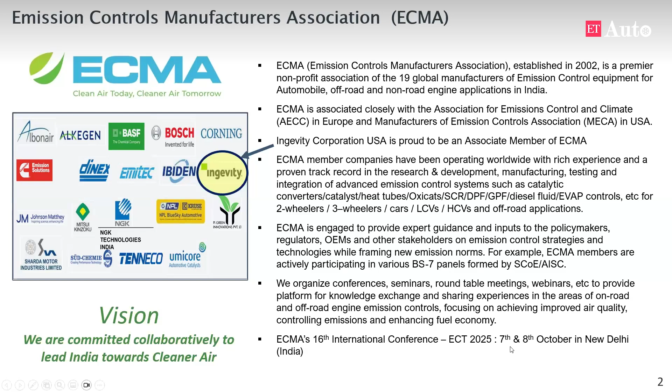Through these webinar series, the objective is to share knowledge with ECMA's family of experts in areas of relevance and interest for today as well as for tomorrow. We would like to disseminate information about cutting-edge technologies and robust solutions that offer ECMA members as well as OEMs the means to meet current and forthcoming stringent emission regulations with an array of fuel options and technology solutions. I'd like to enhance the visibility of ECMA in the automotive world through ECMA's knowledge and expertise, encourage skill development, and provide opportunities for collaborative and participative activities, and update on emission regulations, policy implications, and solutions, hoping that we all learn from these interactions.

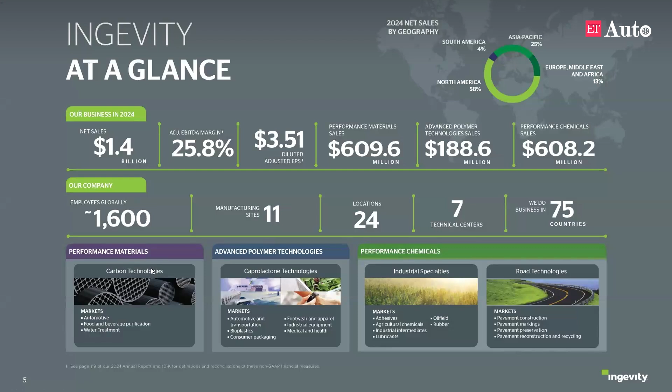We also have a performance chemical and advanced polymer technology segment, which we won't be talking much about today, but we do offer a variety of solutions in automotive coatings, as well as road technologies and road construction applications. Just a quick snapshot of our global presence: we have manufacturing operations in the US and China, and also technical labs and resources within India as well as Europe, again to support our automotive customers globally.

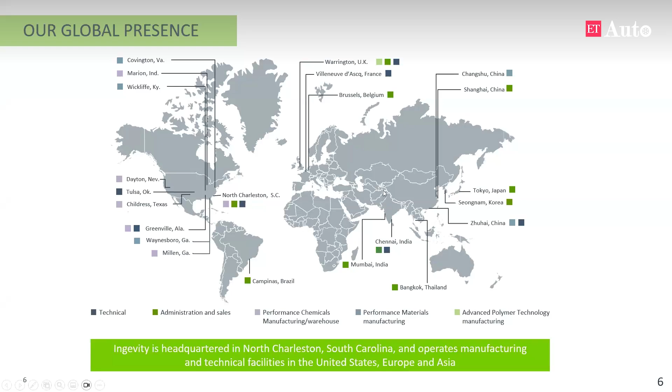There's a little bit about some of the products that we produce as Ingevity. We'd like to say that we're committed to purifying, protecting, and enhancing the world around us. All of the products that we produce either enhance efficiencies or reduce emissions in some way. When we think about our automotive segment, we've estimated that up to 8 million gallons of petrol are saved globally by our activated carbon products every day throughout all the vehicles used around the world.

When it comes to things like road construction, we have additives that can be added to asphalt paving that also reduce total organic compound emissions during paving operations, and these have environmental benefits. In other segments of our business, we touch on bioplastics, providing additives that help make components fully biodegradable in home and industrial composting, as well as in marine and freshwater environments.

We produce chemicals for crop protection that enable less pesticides to be used, as well as improve the durability and longevity of those products. And then we're also in renewable energy and fuel.

I know compressed natural gas is an important fuel for the Indian market, and we actually have technology solutions using some of our activated carbon products that can be used to store natural gas onto vehicles to enable dual fuel platforms.

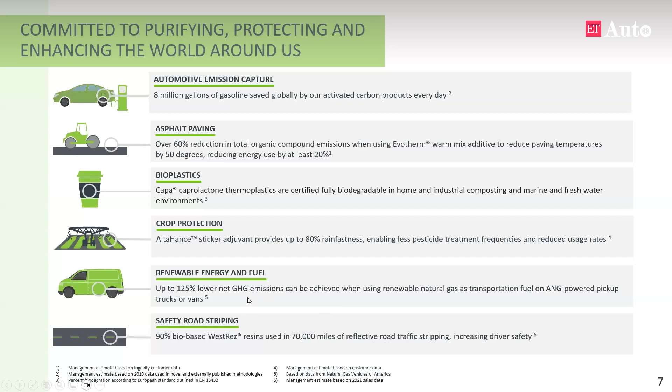These are adsorbed natural gas platforms that we use primarily for larger commercial applications, as well as some segments like school buses. And then finally, we're also in safety road striping, where some of our resins are used in reflective road striping, which increases driver safety. So across a wide range of products, we touch a variety of products that people use every day, but we are kind of an intermediate in that process, where we produce products that we then sell to customers to ultimately make those final products.

So now that you've learned a little bit about who ECMA is, as well as who Ingevity is, let's now get into the topic at hand, which is what are evaporative emissions. During the course of the talk today, I hope the audience will walk away with an understanding of what evaporative emissions are, how they relate to exhaust, how significant they are in India, how they're measured and regulated, and then what can be done to improve the control of these in India.

Just to give an example, as was mentioned in the introduction, evaporative emissions are oftentimes not discussed very often and not well understood. So as a fun experiment, I decided to ask the artificial intelligence to draw me an image of what it thought evaporative emissions from a vehicle would look like.

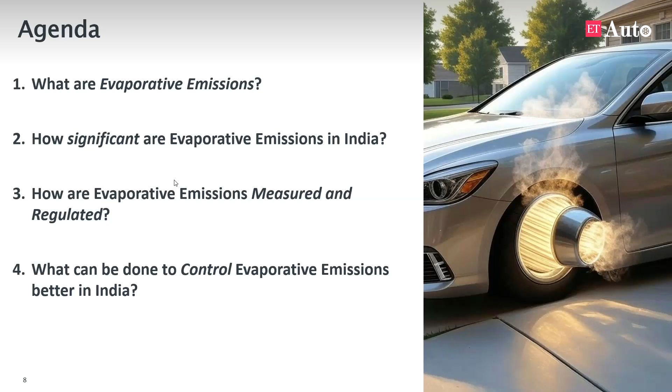Through some prompting and coaching to the artificial intelligence, over time I was able to get it to generate an image that looks a lot more reflective of the actual scenario. You can see in this image, this is just an image of a fuel cap door open, where you can see now it's depicting some vapors escaping from that open fuel cap. So this is a better representation of what evaporative emissions are and one of the potential sources where they can occur.

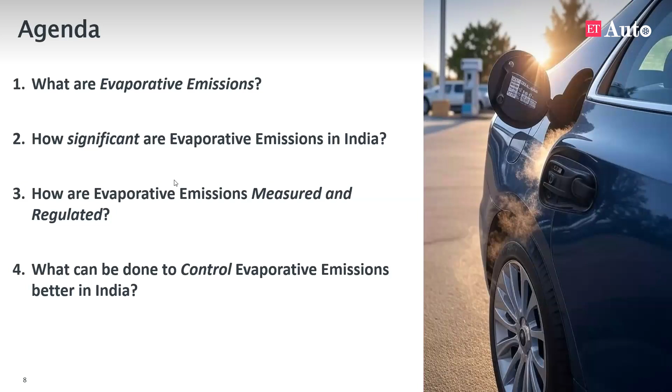So let's just talk about an introduction to vehicle emissions in general. There are a lot of different sources of emissions that come from vehicles. And when I talk about these sources, I'm not just talking about light-duty vehicles, this can apply to any category of vehicle, whether it's two-wheeler, three-wheeler, light-duty, heavy-duty. Most everyone is familiar with the term exhaust emissions.

So this is coming from the tailpipe of the vehicle. They're emitted at a single point from a single process, combustion. You can see these, you can hear them. They only occur during vehicle operation. The pollutants that are often emitted from the tailpipe could include particulate matter, particle mass or particle number, nitrogen oxides, volatile organic compounds, carbon monoxide, carbon dioxide, and water vapor. And the amount and types of species varies depending on the type of fuel that's combusted, the engine conditions, etc. So there's a variety of different exhaust emissions that can be emitted.

And these are controlled through the introduction of catalytic converters, selective catalytic reduction, particulate filters, whether they be diesel particulate or gasoline particulate filters, as well as OBD leak detection to prevent leaks before getting to those control technology solutions.

When it comes to evaporative emissions, this is emissions that's not often well understood. This can come from multiple points. It could come from the fuel tank vent, the lines, as well as non-fuel materials, and from multiple different processes. They're invisible, they're silent, but they can occur at any time. They can occur when the vehicle's operating, they can occur when the vehicle's parked. The only way that you'll typically know that they're there is if, in high enough concentrations, you might be able to smell them.

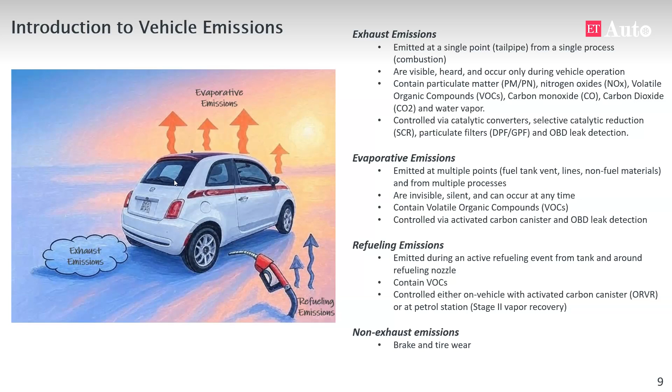Evaporative and refueling emissions are a category of non-exhaust emissions, but they're oftentimes not discussed at the same level as brake and tire particulates. So the focus of today's talk is, of course, going to be on the evaporative and refueling emissions.

Before we get into detail relating to evaporative emissions, one key concept that needs to be understood is related to volatility and vapor pressure. Understanding these two concepts provides the foundation for understanding why evaporative emissions from petrol vehicles can be so high in India. The first fundamental point is petrol is a volatile liquid.

It evaporates quickly into the air. If anyone has spilled petrol, you'll know that you smell it almost immediately, and it will evaporate in a short amount of time. Compared to diesel, which has a lower vapor pressure than petrol, diesel evaporates more slowly. If anyone has spilled diesel, you'll know that it hangs around a lot more, often stickier.

But as you heat up a liquid, particularly a volatile liquid, a lot more of those molecules have the energy to escape. It's the same as when you put a pot of water on a stove to boil. As temperature goes up, those water vapor molecules come off more and more. You have steam, and eventually the water fully evaporates. So temperature is a very important factor, particularly for volatile liquids such as petrol.

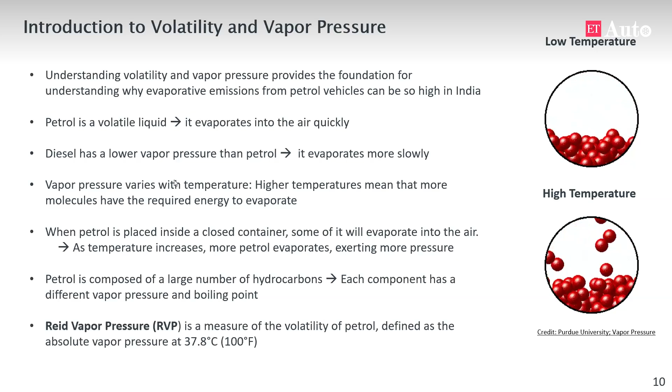A common measure of the volatility of a fuel is the Reid vapor pressure, or RVP. So if I use the acronym RVP, I'm referring to this standard measure of volatility of petrol. This is defined as a given absolute vapor pressure at a given temperature of 37.8 degrees C, using a standard ASTM method for determining the Reid vapor pressure.

This is important because as we think about the types of vehicles that need control, the types of fuels important for evaporative emissions, it's traditionally petrol E0 or the petrol-ethanol blends that have the greatest impact and importance for controlling evaporative emissions.

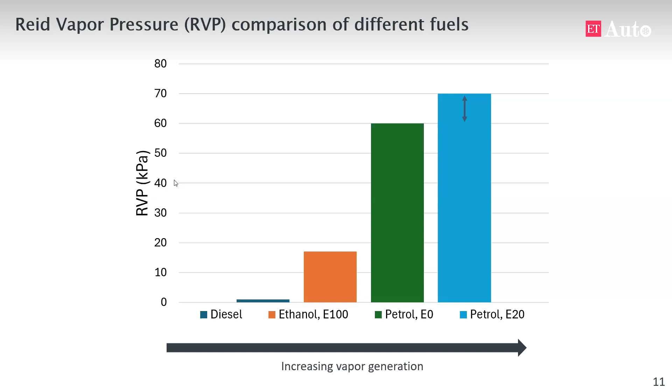In India, the fuels include ethanol, which when blended into petrol increases the vapor pressure, and this increases evaporative emissions. From April 1st of 2025, BS6 vehicles are certified to E20 reference fuel, with specifications allowing a maximum RVP between 60 to 65 kPa, within the range we saw for E20. E20 commercial fuel in India, the fuel dispensed at petrol stations, allows a maximum RVP of up to 70 kPa. This accounts for the fact that when ethanol is splash blended into petrol, there is an increase in RVP, so there's a higher RVP allowance for the commercial fuel relative to the certification fuel.

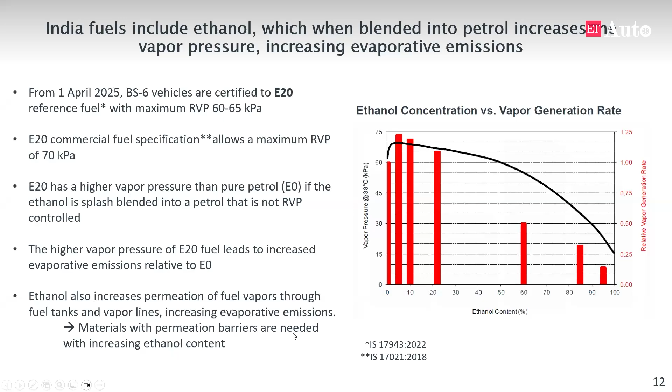Automotive evaporative emissions are a mix of non-fuel based and fuel-based evaporative emissions. These are any emissions that escape into the atmosphere from any vehicle, particularly vehicles with petrol fuel tanks. The non-fuel-based emissions include things like tires, paint, plastics, and adhesives.

These are highest for a new vehicle, and then over time they will reach a steady state. Oftentimes, before a vehicle is put through a certification test, these components are aged to allow them to reach a non-fuel background type of level.

The fuel-based evaporative emissions are much higher than these non-fuel-based emissions, and this comes from sources such as the fuel tank, the fuel lines, connectors and seals, the fill pipe and fuel cap, and the air induction system. Essentially any component on the chassis of the vehicle that is in contact with fuel has the potential to be a source of evaporative emissions, whether through permeation of that material, escape of vapors, or leaks in that system.

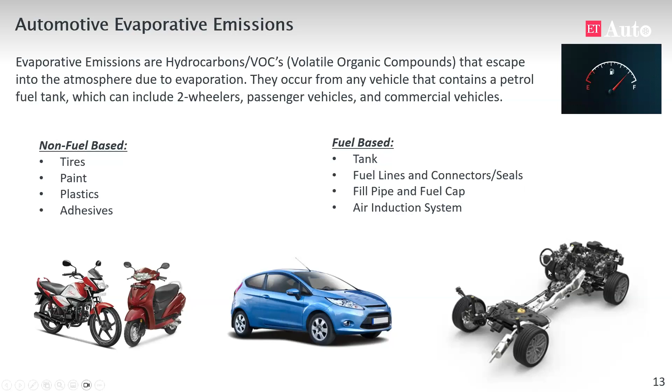A key point with evaporative emissions is they occur even when the vehicle is not operating. There are a variety of sources that can occur when the vehicle is off. The first of those is what we refer to as hot soak.

This is essentially the 1 hour period that occurs after you turn off your engine. When you've driven your vehicle across the city, the vehicle heats up over time due to the engine, the exhaust gases, temperatures from the environment, and the road surface. All of that serves to heat up the vehicle, and vapors are generated as the vehicle heats up. So when you turn off the vehicle, there's a cool down period, and vapors are generated as heat transfers from the engine, the exhaust, and the road after shutdown. That 1 hour period is referred to as the hot soak period.

When we get into the testing, there is a specific test done for vehicles: a 1 hour hot soak test.

The second source is what we call diurnal emissions. These are vapors generated in the fuel tank during the daytime temperature rise. If your vehicle is just sitting outside, parked, during the heating of the day, the temperature of the vehicle will increase, and the temperature of the fuel in the fuel tank will increase as well. The higher the temperature outside, the more the fuel tank heats up. As we learned earlier, temperature is a key component of volatility, so as temperature increases, evaporative emissions increase.

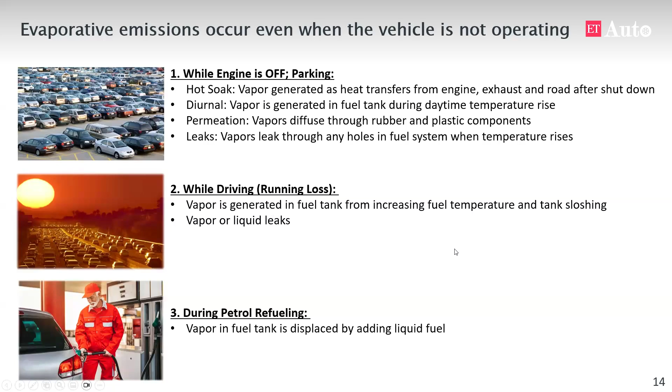Those are the emission sources when the vehicle is off. There's also emission potential when the vehicle is driving, referred to as running loss emissions. As you operate a vehicle, the longer you operate it, the warmer it gets due to heat from the engine and the road surface, which tends to increase the temperature of the fuel in the tank. When driving, you're also actively moving the fuel around, something we call fuel tank sloshing, and that agitation can also increase the evaporative emissions in the tank.

Finally, there's an emission source during petrol refueling. The vapor in the fuel tank is displaced by adding liquid fuel, and that vapor then has to go to some type of control device, or it escapes to the atmosphere.

Now that we've talked about the different types of evaporative emissions, why is it so important that we control them? Evaporative emissions are volatile organic compounds, which are one of the major contributors to the formation of particulate matter and ozone in the atmosphere, creating smog and haze. There's a lot of documented evidence looking at the impact of volatile organic compounds on the formation of these pollutants.

The more these pollutants are emitted, the higher the concentrations in the atmosphere, and the more these reactions can take place. These reactions often take place during the summer seasons, when evaporative emissions are at their highest levels.

This is when, oftentimes in many different cities across the world, you see the greatest concentration of these types of smog and haze events. It's this reduced air quality that has led many regions of the world to adopt measures to reduce volatile organic compounds, including measures to reduce evaporative emissions from vehicles. In the United States, that was one of the key measures that led to the adoption of the technologies we'll be discussing today.

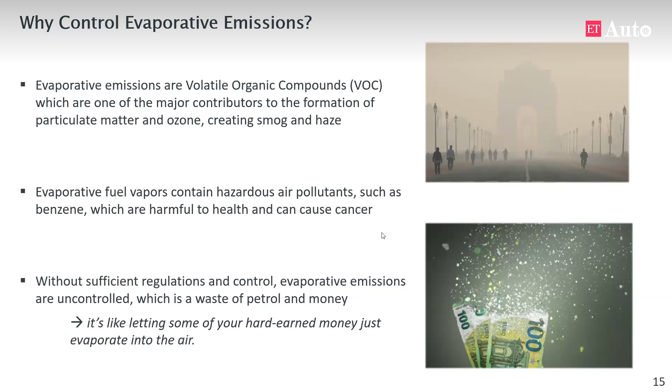It's like letting some of your hard-earned money just evaporate into the air. You pay for the fuel, and you would like for the fuel to stay on the vehicle to be used to drive it. You don't want the fuel essentially just evaporating into the air over time. So these control technologies are important not only for improving air quality, but for keeping valuable fuel on the vehicle to be used. If we look at the market of vehicles in India, petrol engines and evaporative emissions are most prevalent for two-wheelers and passenger cars.

The figure on the right shows the proportion of fuel type based on vehicle category. For passenger cars in 2024, more than 60% of vehicles sold contained a petrol engine, with the remainder being diesel, compressed natural gas, or battery electric. For two-wheelers, it's predominantly petrol engines, but battery electric vehicles are gaining traction over time. For three-wheelers, it's a more diversified mix of petrol, compressed natural gas, and battery electric vehicles.

There are over 18 million two-wheelers sold in India annually, with an average fuel tank size of about 10 to 15 liters. There are about 4 million passenger vehicles sold, with an average fuel tank size of between 50 to 60 liters. So even though two-wheeler sales are 4 times higher than passenger car sales, evaporative emissions from passenger cars can be equally important because the average fuel tank size is 4 to 5 times larger than a two-wheeler. The larger the fuel tank size, the more fuel, and the more potential for evaporative emissions.

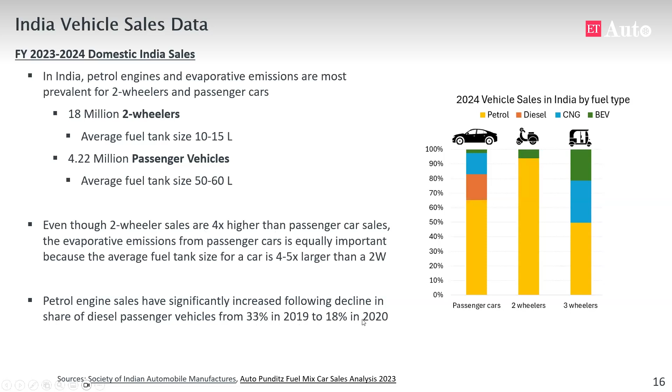Another important factor for passenger vehicles is that petrol engine sales have significantly increased following a decline in the share of diesel passenger vehicles, which were about 33% in 2019 and currently stand around 18% after 2020. This sudden decrease in diesel engine sales came after the introduction of the Bharat Stage emission standards.

This is because, as noted before, evaporative emissions come from a variety of different sources on the vehicle. You can't just place a sensor in one location and get a representative measurement. You have to measure the emissions coming off the entire vehicle, including non-fuel sources as well as fuel-based sources. These sheds are used to quantify the hot soak emissions, the diurnal emissions, as well as the refueling emissions. Since it's an enclosed environment, you're also capturing the non-fuel background, fuel permeation, and evaporative emissions from any leaks in the system.

The current Euro 6D diurnal temperature profile starts at 20 degrees Celsius, increasing over 12 hours to a maximum of 35 degrees Celsius before cooling back down to 20. That profile of going from 20 to 35 back to 20 is what we call a one-day diurnal temperature profile. Based on different regulations, these diurnals can be 1, 2, or 3 days in length, because you're trying to simulate the diurnal emissions that occur when a vehicle is parked, and vehicles can be parked for multiple days.

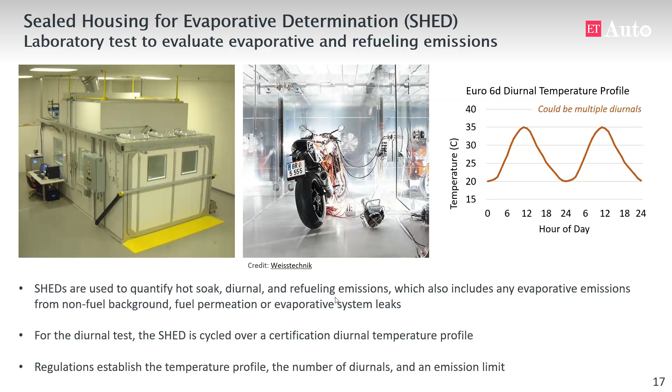Regulations use this shed, and they establish the temperature profile, the number of diurnals, and an emission limit. It's the combination of those three factors which determines the stringency of the evaporative emissions regulations. That stringency then also drives the technology control response put on the vehicle to control for those emissions.

If we look at different markets across the world, there is some level of regulation on evaporative emissions for passenger cars and two-wheelers, but the stringency varies. Focusing first on India, the current regulation is BS6, through a standard procedure called AIS 137. This standard does not include onboard refueling, and it's a one-day diurnal test with a 2 gram per test limit.

Going back to that shed, the vehicle is placed inside and run over 1 day of diurnal temperature profile. The emissions that come from the hot soak, the background, the diurnal, and the permeation all cannot be higher than 2 grams per 24-hour test.

There's been a recent notification to adopt BS6 phase 3, which also introduces the WLTP drive cycle. As part of that notification, there will be a new test procedure referred to as AIS 175. That procedure does not include the onboard refueling standard, but it includes a 2-day diurnal test. So India will be moving from a 1-day test to a 2-day test with the same limit, proposed to take effect around the year 2027.

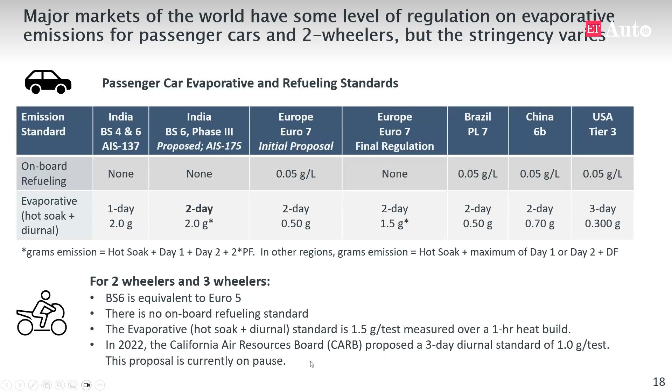So how is the fuel vapor captured before it gets to the atmosphere? There are several main components of the evaporative emission control system. The first primary component is the activated carbon canister. The fuel tank on the vehicle is one of the major sources of evaporative emissions, and as that fuel tank increases in temperature and vapors are pushed out, they go first to an activated carbon canister system.

The activated carbon has a specific pore structure designed to capture those hydrocarbon vapors and store them on the carbon. As fuel vapors get released from the tank, they're directed to the canister and the canister stores them. But a canister only has a certain amount of capacity and cannot store these vapors indefinitely. Once the carbon becomes saturated with fuel vapors, that canister could then become an emission source. So it's very important that activated carbon canisters are sized appropriately to manage the fuel vapors expected during a variety of in-use scenarios.

That canister is also connected through lines to the engine where there is a purge valve. This canister purge valve is another very important component of the evaporative emission control system. When the engine is on and the vehicle's operating, this valve can be commanded by the engine control module to open, allowing the engine to draw the fuel vapors out of the canister and use them for combustion. This is a process we call purge.

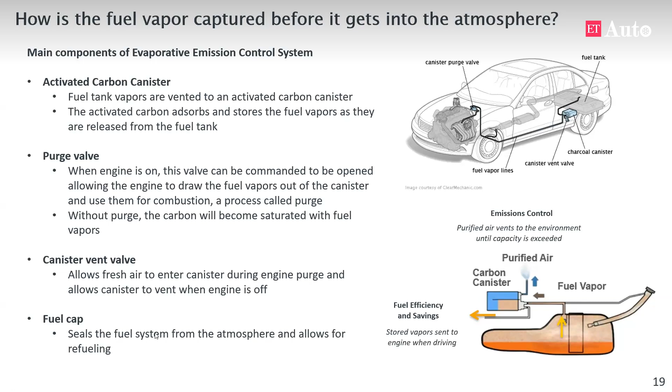So now we're just going to look at some examples of canister systems.

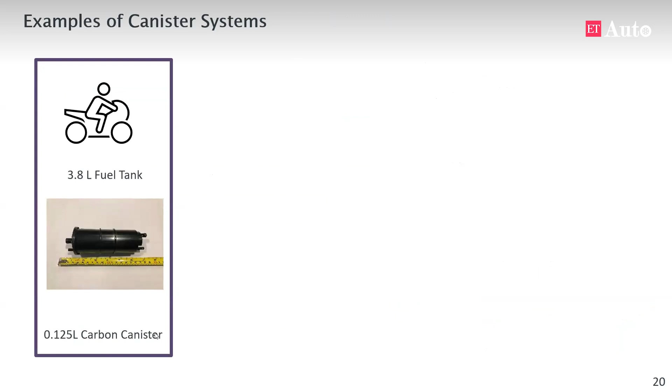For 2-wheelers, which have small fuel tanks, you'll often find a relatively small carbon canister system, because canister systems are designed to manage the fuel vapors generated from the fuel tank. Smaller fuel tank systems will oftentimes have smaller canister systems. If you move to a larger fuel tank, a 13.2 liter fuel tank on a two-wheeler, you'll see that the canister size typically increases. In this case, it was a 0.36 liter canister.

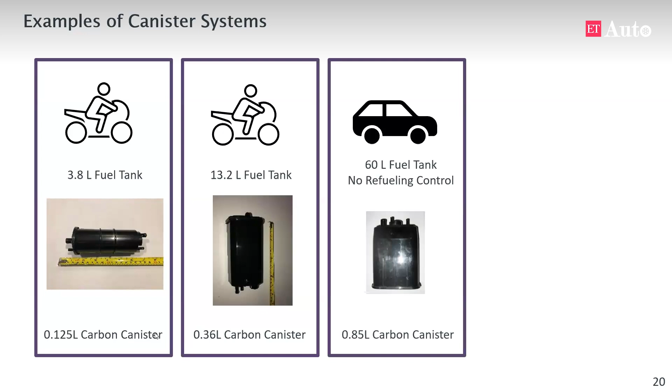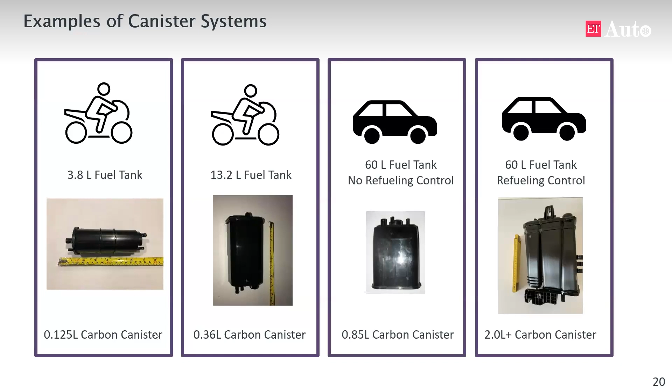If we move to light-duty vehicles, which could have upwards of 60 liter fuel tanks, if that vehicle does not have refueling control, then the canister systems are often around 1 liter or less. If it's a 60 liter fuel tank with a refueling control standard, those canister systems can be 2 liters or larger in size. When we get to later data, you'll see the importance of this larger canister size, because it not only controls for refueling emissions, but that larger canister capacity is also very important for controlling the diurnal emissions that occur during parking.

So first, we're going to talk about refueling emissions, which can be quite significant without proper control. What we're going to do now is look at infrared videos of different refueling events. As I mentioned earlier, evaporative emissions are really difficult to see with your eye, and they're generally non-visible. But through the use of infrared technology, those evaporative emissions, those hydrocarbons, can be visualized.

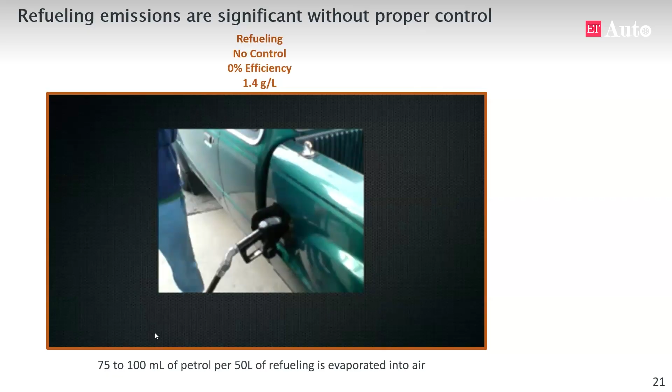What we'll be looking at here is first a refueling of a vehicle that has no control technology for refueling. There's no onboard refueling vapor recovery system, and there's no stage 2 system on the petrol pump. As this fuel tank gets filled, the vapors are going to escape out of the point of least resistance, which is out the fill pipe. You can see here on the visible infrared image, the vapors coming out of the fuel tank around that nozzle during the refueling process.

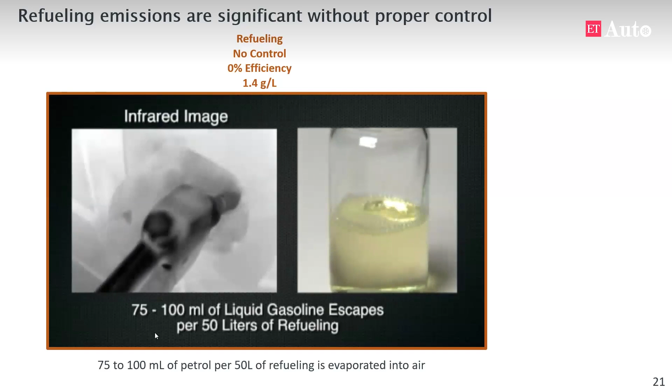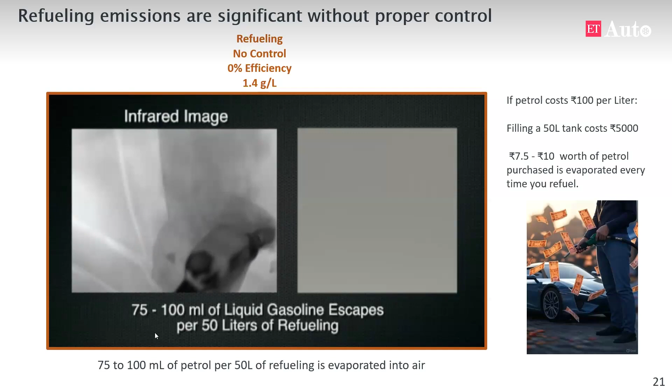During a refueling of a 50 liter tank, 75 to 100 milliliters of liquid gasoline escapes during that process. So if we put that into real economic terms, if petrol cost 100 rupees per liter, filling a 50 liter tank would cost about 5,000 rupees, and about 7.5 to 10 rupees worth of petrol purchased would be evaporated every time a refueling event takes place. This occurs for each vehicle, so you can see this would add up quickly over time.

We can now also look at refueling emissions if we have a stage 2 vapor recovery system. This is a system that can be installed at the petrol station. The way stage 2 vapor recovery typically works is the nozzle is replaced with a nozzle that can pull essentially an airflow through it, designed to capture the vapors actively coming out of that filler neck during the refueling event.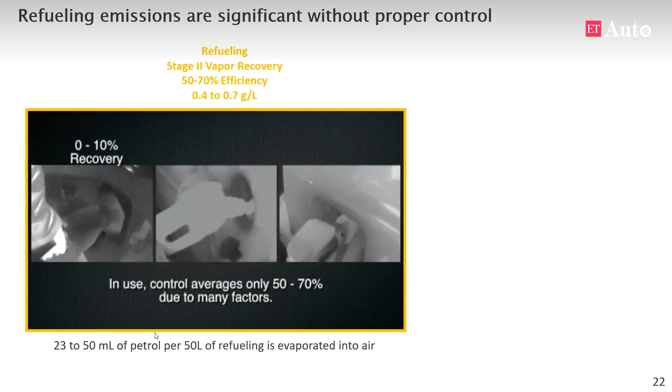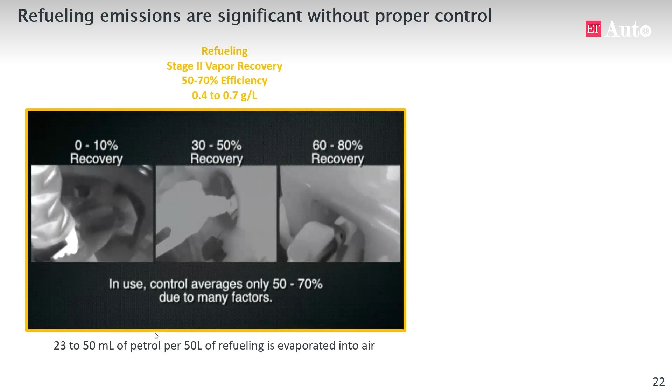But due to a variety of different factors, the efficiency of stage 2 in use can range between 50 to 70%. As we look at these images, one thing you'll notice is depending on the calibrations, inspection, maintenance, and how well the seal is between the nozzle and the vehicle, all can affect the vapor recovery efficiency. This can range from essentially no control for the worst performing systems to upwards of 80% for better performing systems. Another important point is that you're actively capturing the vapor from the nozzle and directing it back to the underground storage tank.

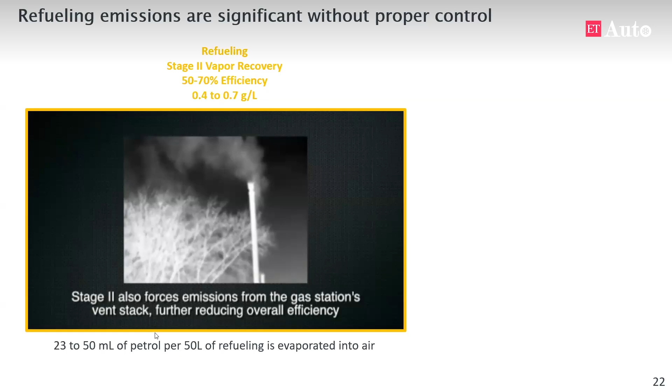That underground storage tank then vents through a vent pipe as shown here. If there aren't controls on the vent stack, it's essentially taking the emissions from one point and they can then be emitted out of another point. So there are a variety of limitations that can exist with stage 2 systems. The first is that not every petrol station may have stage 2. It requires rigorous inspection and maintenance to maintain the certification efficiency. These systems often certify to levels of around 85% efficiency, but experience and use suggests these efficiencies can deteriorate and be as low as 50%.

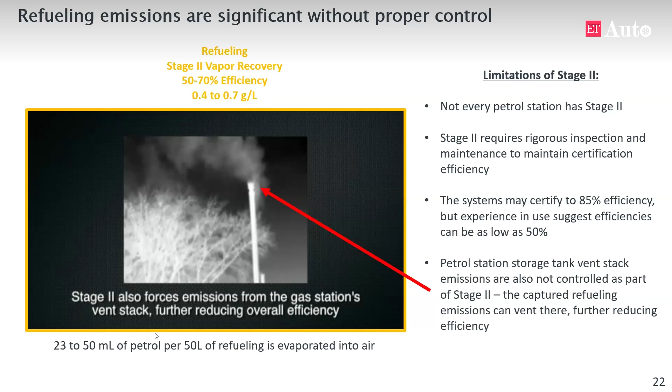And finally, petrol storage tank vent stack emissions are generally not controlled as part of stage 2. So the captured refueling emissions can simply vent out of these vent stacks, which further reduces the efficiency. This loss of vapors is not accounted for when calculating the efficiency of stage 2.

During stage 2, 23 to 50 milliliters of petrol per 50 liters of refueling can be evaporated into the air. Another solution for controlling refueling emissions is onboard refueling vapor recovery, or ORVR. This involves installing a larger canister system on the vehicle, and changing refueling pipe diameters and lines so vapors are directed to the activated carbon canister on the vehicle, rather than out the fuel fill pipe. So when there's ORVR on a vehicle, there's no need for a stage 2 system to actively pull vapors from the refueling operation.

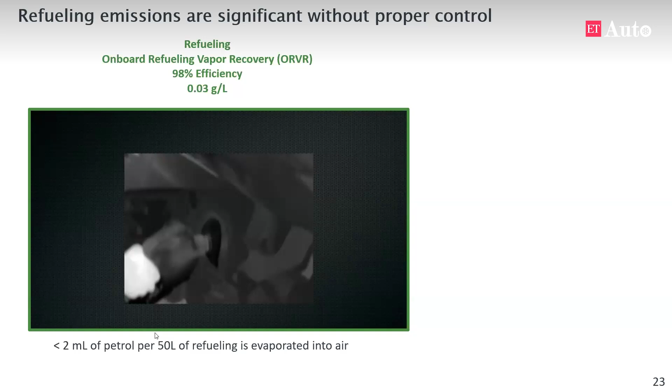Vapors are directed to the canister where they are sufficiently controlled, and the control efficiency of these onboard refueling vapor recovery systems has been demonstrated in the US to be 98% efficient. As we watch this video of a vehicle being refueled with an ORVR system, you can see clearly there are no visible emissions, even through the infrared camera, being emitted from this refueling event. This demonstrates the 98% control efficiency of the ORVR system. In this case, less than 2 milliliters of petrol per 50 liters would be evaporated.

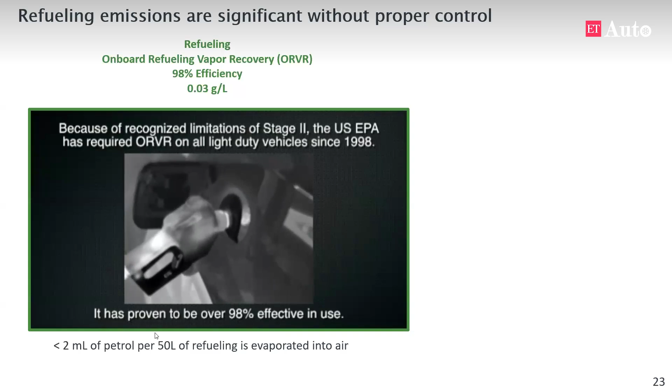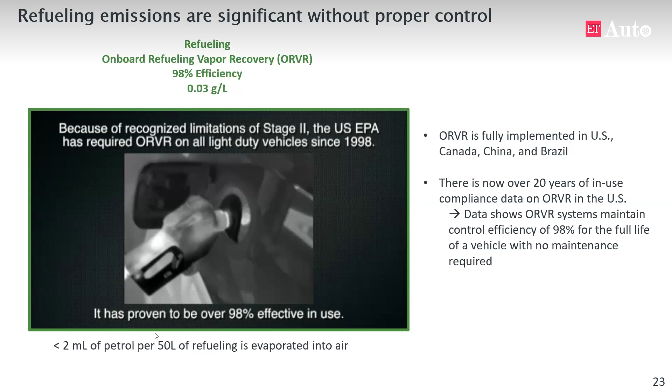An important point about onboard refueling vapor recovery systems is that they're fully implemented in the US, Canada, China, and Brazil. Specifically within the US, we now have over 20 years of in-use experience and compliance data on these ORVR systems. All vehicles in the US must undergo in-use verification testing at both low and high mileage conditions, and that data has continued to show that ORVR systems maintain 98% control efficiency for the full life of the vehicle, with no maintenance required on those canister systems.

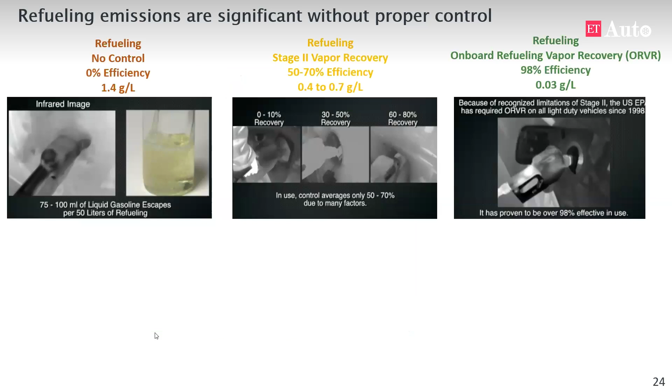So refueling emissions can be significant without proper control. In some cases in India, there is no control of refueling emissions. In those cases, if you're refueling at a station with no control and your vehicle has no onboard control, anywhere between 7.5 to 10 rupees worth of fuel is evaporating during that refueling event. If the station has stage 2, the efficiency could vary significantly, depending on the inspection, maintenance, and operation of that particular facility.

As a demonstration, the US had stage 2 in the early 90s, and the US EPA, as well as the California Air Resources Board, determined that the maximum efficiency that could be achieved from those systems was 70%. So over time, the US decommissioned the stage 2 systems in favor of onboard refueling vapor recovery systems.

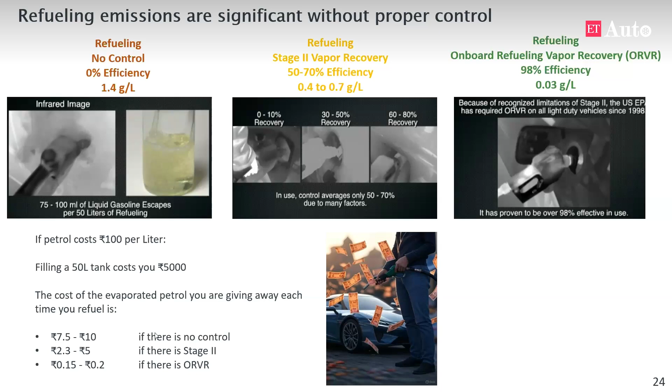If you're refueling at a station with stage 2, depending on the efficiency of that system, the loss of value in fuel could range between 2 to 5 rupees. And if there's an onboard refueling vapor recovery system on the vehicle, 98% of those refueling vapors could be maintained on the vehicle, so it would be a very small loss of value in that example. So the type of technology is very important for controlling refueling emissions.

To put this into comparison with exhaust emissions, because one thing often not considered is how these refueling and evaporative emissions compare with exhaust: the current exhaust standard for a Euro 6D vehicle or a BS6 vehicle is 68 milligrams per kilometer. That is the maximum amount of hydrocarbons allowed from the tailpipe during a certification test. So it's 68 milligrams per kilometer.

Based on a car's fuel tank size, as well as its fuel economy, we could determine how many miles a car could drive on a full tank of petrol. So what I've done here is estimate what the exhaust emissions would be for driving a full tank to empty. That comes out to about 50 grams of emissions from 768 kilometers of driving. If we compare that to refueling with no control, you can see that the refueling emissions occurring over that few-minute refueling event are comparable to the emissions that occur over the full range of driving that tank to empty.

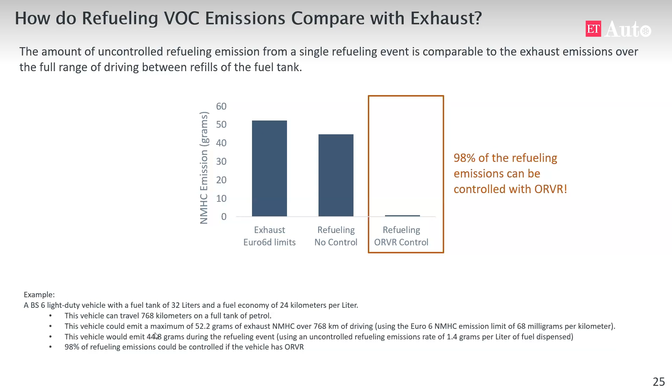When it comes to exhaust emission limits, there's not much further that could be done to significantly reduce those limits. But for refueling control, simple technology solutions could control 98% of refueling emissions with the adoption of onboard refueling vapor recovery systems. So refueling emissions are an important source, but they can be effectively controlled with the right regulatory process.

Finally, diurnal emissions are significant in India. I spent quite a bit of time talking about refueling emissions, but I also want to talk about the importance of emissions that occur when the vehicle is simply parked. This is because it's the combination of high temperatures and high vapor pressure fuel that creates unique challenges for India that don't occur in other regions of the world.

European standards and test conditions are not sufficient to resolve these challenges. If there's one point you could take away from the webinar today, it's this: European standards and test conditions are not sufficient to resolve the challenges that occur in India.

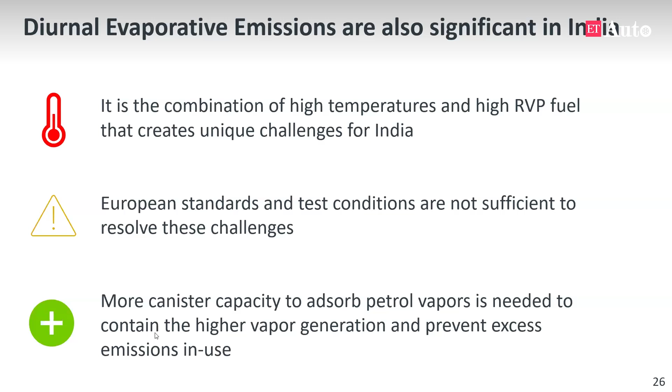More canister capacity is needed to adsorb the petrol vapors and contain them to prevent excess emissions in use. When it comes to temperatures, India is not comparable to Europe, and so a different approach is needed for regulating evaporative emissions.

Temperature is an incredibly important parameter when thinking about the potential for evaporative emissions from a volatile source such as petrol. The current certification profile for the hot soak and diurnal test in Euro 6D and Euro 7 is a 20 degrees Celsius to 35 degrees Celsius temperature profile, shown here in the bottom right in black.

This certification profile is representative of a lot of European cities. We looked at temperature data going back several years across a variety of European cities, and this chart shows the fraction of days within each year where temperatures exceed that 35 degree limit. For most European cities, a very small fraction of days exceed that threshold, with Madrid having the highest frequency, approaching about 8%.

But if we look at India, we see a much different picture, where Indian summers can be quite hot, ranging between 40 and 45 degrees Celsius. Across a variety of Indian cities, a significant fraction of days, in some cases more than 35-40% of the days of a year, exceed that 35 degree Celsius threshold. This is incredibly important because evaporative emissions increase exponentially with temperature.

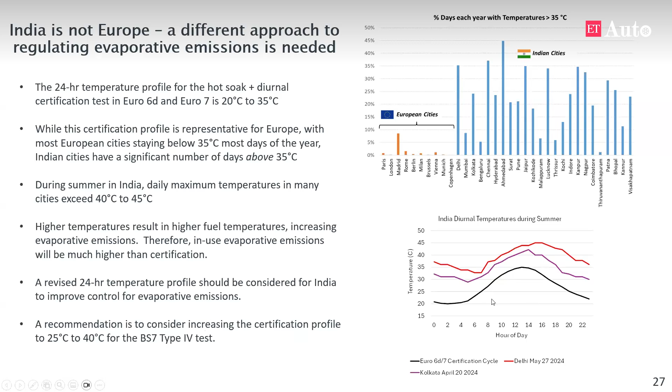If you look at the current certification profile versus a profile representative of a hot summer day in either Delhi or Kolkata, you again see that the certification temperature profile is much lower than what's actually observed in these regions. So one recommendation that could be considered within BS7 is a different temperature profile, shifting the certification profile upwards to account for the warmer climate of India.

This is important because diurnal vapor generation, the vapor that comes from a vehicle that's parked, can be more than 150% higher in India conditions relative to Europe.

The amount of vapor generated from a fuel tank can be accurately modeled, based on a long history of laboratory experiments where fuel tanks have been heated to certain temperatures with different fuels. Through these experiments, you can build predictive models to estimate vapor generation under a given set of conditions. One common model used in the industry is the Wade-Reddy equation, which I've used here to estimate fuel vapor generated under a given set of conditions.

In all of these examples, it's a 60-liter fuel tank, a fuel tank for a light-duty vehicle, that's filled 40% with fuel.

That 40% number just comes from the average volume of a fuel tank. Not a lot of people wait until their fuel tank is completely empty before they refill it, so 40% is meant to be a representative average estimate of fuel tank volume.

Then you can look at different fuels. The first two shown in black are conditions representative of Europe: a 60 or 65 kPa fuel ranging between E0 to E10, at a 20 to 35 degree Celsius diurnal temperature profile. Under those European conditions, a fuel tank is estimated to generate between 25 to 30 grams per day of fuel vapor. So when canister systems are designed for vehicles under these conditions in Europe, they ensure those systems can capture between 25 to 30 grams per day. If it's a 2-day test, you'd multiply those numbers by 2, making sure the system could capture between 50 to 60 grams per day.

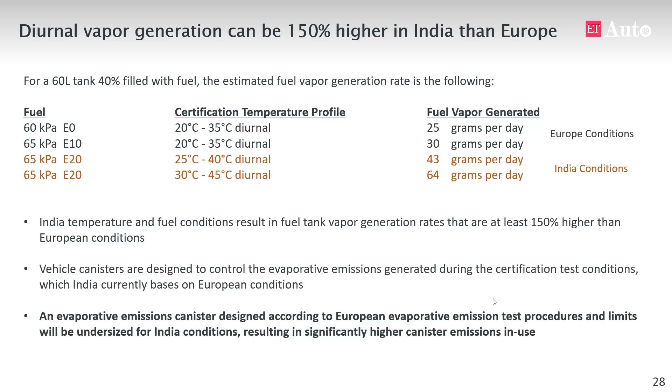One of the challenges here is that if a canister system is designed to only capture 25 to 30 grams per day, but in reality we're seeing 43 to 64, these canister systems could quickly become saturated and be sources of evaporative emissions. So an evaporative emissions canister designed to European type conditions and limits would be undersized for India conditions, which has the potential to result in higher canister emissions in use. To demonstrate this, we've performed laboratory testing to show that systems designed to European standards would have higher emissions in those India conditions.

As we mentioned earlier, evaporative emissions can be tested in sheds. You could test the full vehicle in a full vehicle shed, but you can also test just the fuel system—the fuel tank, the lines, and the canister system—in what's also referred to as a mini shed. These mini sheds are used in canister development during the design process.

We conducted 2 tests with this system. The first was a certification test condition: an E20 fuel of 60 kPa with a diurnal temperature profile of 20 to 35 degrees Celsius, representing one of the scenarios that could take place during a certification test. We then repeated the test under an India-specific condition: an E20 fuel with a slightly higher vapor pressure of 65 kPa and a diurnal temperature profile representative of a city like Delhi during summer, 30 to 45 degrees Celsius.

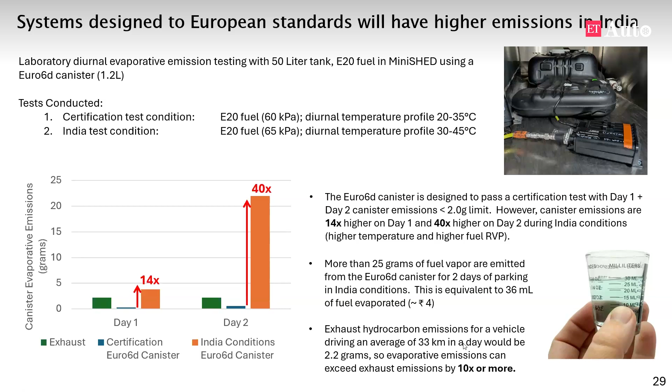This is a challenge, but it is one that can be solved. So what we did is retest these systems using larger capacity canisters designed to control for refueling — these are onboard refueling vapor recovery, or ORVR, systems. We wanted to understand how these systems could control the diurnal emissions, testing the same laboratory 50-liter tank with E20 fuel.

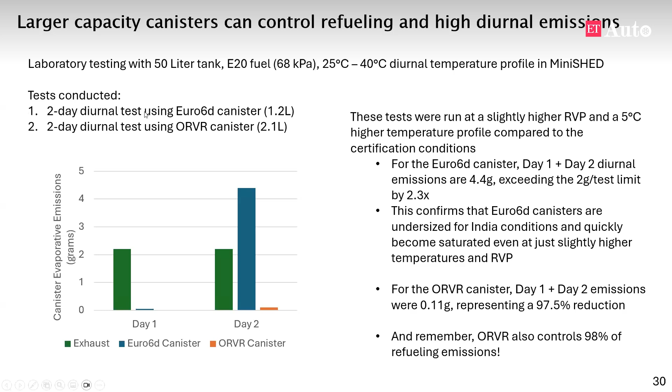In this case, we used a slightly higher vapor pressure and the 25 to 40 degree diurnal temperature profile, meant to represent conditions that could occur across India during the summer. We did a 2-day diurnal test with the Euro 6D canister, which was 1.2 liters, and then repeated it with the ORVR size canister, which was 2.1 liters.

For the Euro 6D canister, these test conditions are off-cycle, meaning not the certification test condition, since it's slightly higher RVP and a slightly higher temperature profile, shifted by 5 degrees. On day 1, emissions were less than 1 gram, but by day 2 the canister becomes saturated, emitting around 4.4 grams total over day 1 and day 2.

This exceeds the 2 gram per test limit by more than 2 times. It's another data point confirming that Euro 6D canisters are undersized for India conditions, and can quickly become saturated even at just slightly higher temperatures and higher vapor pressure fuel.

But for the ORVR canister, day 1 emissions were not detectable, and day 2 emissions were around 0.1 grams, or 100 milligrams. This represents a 97.5%, or around 98%, reduction in diurnal emissions under these conditions for the India scenario.

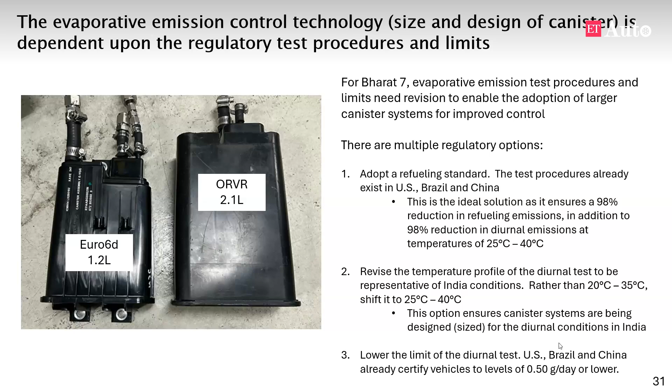So some concluding points: evaporative and refueling emissions are effectively controlled across the world. One of the most effective ways to control these emissions is with onboard refueling vapor recovery systems. You could also use larger canister systems as another option. There's been more than 25 years of successful implementation of these solutions in global markets. They're cost effective and have been demonstrated to reduce emissions by more than 98%, while also controlling hot soak and diurnal emissions to levels less than 0.3 grams per day.

So if we think about the current situation in India, Bharat 6 vehicles contain a one-function canister. That could be further improved by the adoption of ORVR, which is a two-function canister that captures emissions from refueling, in addition to the excess emissions that occur from diurnal emissions during warm temperatures.

These petrol vapors are stored in the canister until the vehicle operates, and then they're used by the engine for combustion. So more than 98% of refueling vapors can be captured, it requires no maintenance, and the cost of the control technology is recovered by the consumer in fuel savings.

As noted earlier, the savings between every refueling event is between 5 to 10 rupees, and every 2-day parking event during the summer could be as much as 4 rupees. Over time, over the life of a vehicle, those small amounts add up and can quickly cover the cost of the system.

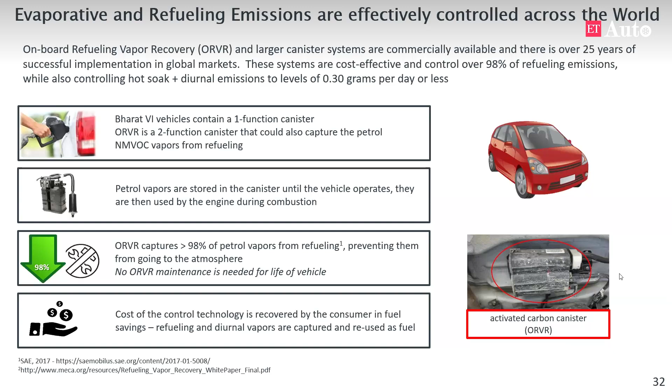Such as the larger canister system shown in this picture, adopted on a vehicle. Because all vehicles already have a canister system, it's simply changing a few design elements - making the canister slightly larger, changing a few of the lines. The cost of shifting the technology to an onboard refueling vapor recovery system is generally less than 30 euros, or less than 3,000 rupees. So that cost can be recovered just from the fuel savings alone.

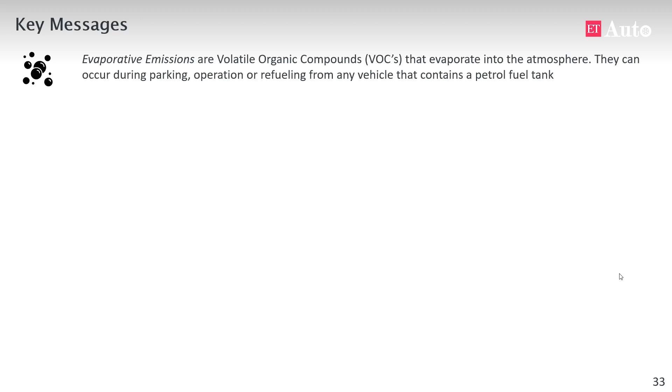So in wrapping up, the key messages from the webinar today: evaporative emissions are volatile organic compounds that evaporate into the atmosphere. They occur during parking, during operation, or the refueling of any vehicle that contains a petrol fuel tank. This includes two-wheelers, three-wheelers, commercial vehicles, and passenger vehicles - any vehicle that has a petrol fuel tank will have evaporative emissions.

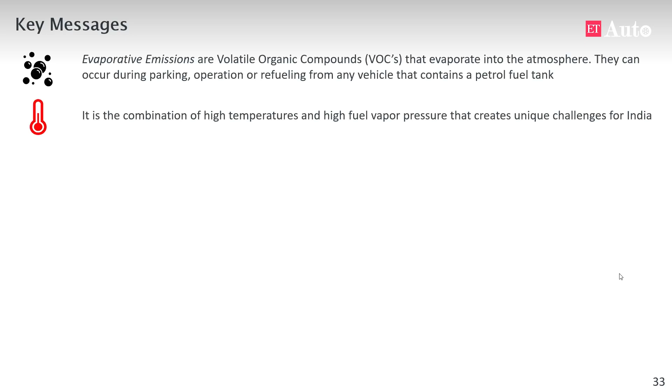For India, it is the combination of high temperatures and high fuel vapor pressure that creates unique challenges. The European standards and test conditions are not sufficient to resolve these challenges.

Diurnal evaporative emissions from canisters designed to Euro 6D could increase by more than 40 times when tested under conditions common to India. This can be more than 20 grams per vehicle per day, which is more than 10 times the amount that comes from the tailpipe. We expect Euro 7 canisters will be similar to Euro 6D, so simply adopting Euro 7 would not be the solution to the challenges India is facing.

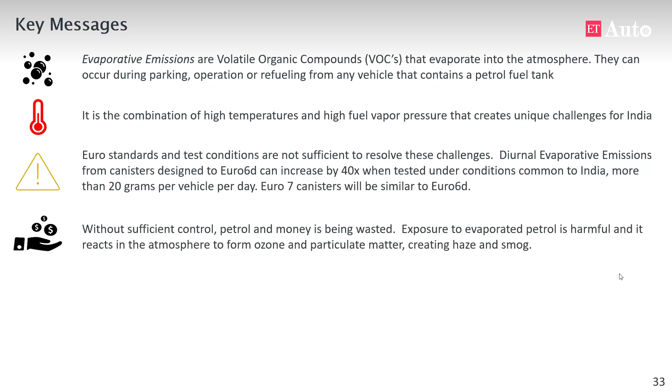Without sufficient control, petrol and money is simply being wasted. Exposure to evaporated petrol is harmful, and it reacts in the atmosphere to form ozone and particulate matter, creating haze and smog. So this is again an important category of emissions with important impacts that can be effectively controlled. Simple changes to the Bharat regulations can lead to the adoption of improved control technology.

Larger canister systems are needed to not only control refueling emissions, but also prevent excess diurnal evaporative emissions during conditions common in India. Finally, systems such as ORVR could capture refueling emissions by 98% and control diurnal evaporative emissions by 98%. These systems cost less than 3,000 rupees, as evidenced from impact assessments done by the US EPA as well as the European Commission, and they require no maintenance for the life of the vehicle.

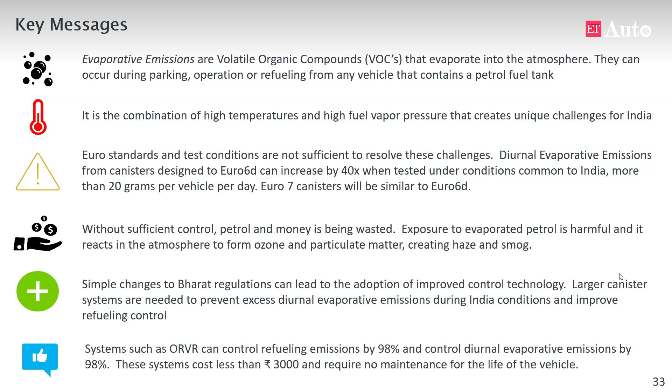Thank you, Terry, for that very comprehensive and informative presentation. I have to admit, some of the slides were no less than eye-openers for me. And especially, thanks for putting things in perspective - sitting in the US, putting things in perspective in Indian value terms for the audience here.

So I can imagine if you're refueling a 50-liter gasoline tank, it could lead to a loss of 7.5 or 10 rupees per refill if there is no efficient capturing of the evaporative emissions, right? In absolute terms, for one filling, it may not be a significant value, but if you multiply that with the number of vehicles filled at a particular petrol station or gas pump, it could be significant - which can be avoided by efficient use of the options that you mentioned.

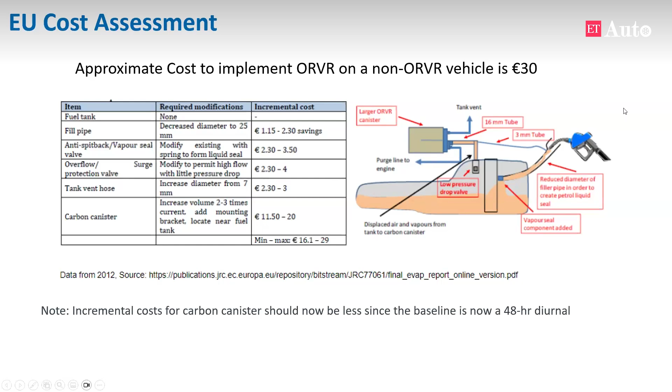Thanks for the explanation, Terry. Prakash Sardesai asks: if Europe is not agreeing to ORVR, how can we expect Indian legislators to agree for the same?

That's his comment. Yeah, it's a challenge considering India has historically followed European norms - that's been the historical case. In this situation, what it would require is the adoption of an additional test procedure that does not exist in the European norms. So it would just require the decision to make a change that is different from the European norms; the rest of the European norms could still be followed. It's just adding a supplemental procedure to those European norms.

And again, when it comes to ORVR, it's not like India has to create its own test procedure - the test procedures that exist are consistent across all the regions that have adopted it. I think some recent examples of that decision to deviate from European norms have been taken by other nations: Brazil being one, China being another. They historically had followed European norms, but due to unique challenges within their countries - China had a strong desire to improve air quality and create the 'blue sky days' as they referred to, going back many years ago - they made the conscious decision to deviate from European norms because they recognized those norms weren't providing the benefits they needed for their country. So I think the same thought could occur within India.

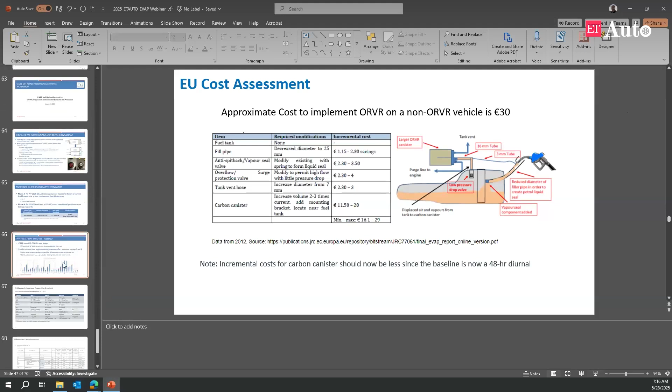The only data I have, and I do have a slide here, let me just pull it up. So I can share one of the slides that California had presented back when they were doing their proposal. This is the only data that I'm aware of regarding two-wheelers.

This was a test on 10 different two-wheelers over a 3-day period, looking at whether a single day of testing reflects emissions that could occur over multiple days of parking. One concern, particularly out of California, was that people typically only drive their two-wheelers on weekends. I know that's different from the Indian condition where they're often driven every day. But what this does show is day 1, day 2, and day 3 type emissions from a variety of different two-wheelers, designed for the current 1-hour test. They were showing that, as you might expect, the more days the vehicle is parked, the higher the potential for evaporative emissions.

This was over California's higher temperature profile, similar to what we were suggesting India look at. California tests up to 40 degrees Celsius because it has higher temperatures than other parts of the U.S. California actually has its own temperature profile representing a summer profile, as well as its own fuels. So this is the data I'm aware of. We haven't done any testing of our own in recent years looking at two-wheelers, but there would be a difference between the current 1-hour test versus multiple days of diurnal testing.

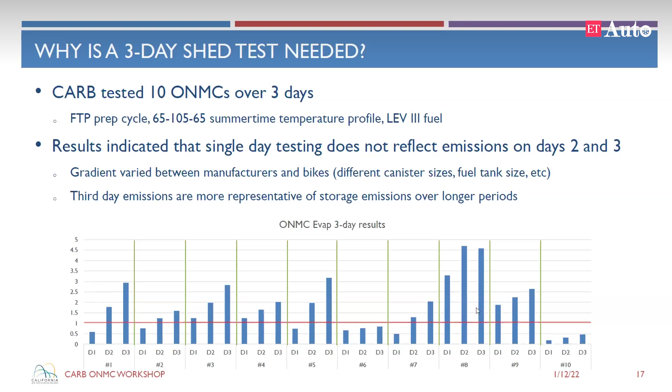So our recommendation would be that the temperature profile would be shifted upward, but the limit value does not change. Next, Naran Prakash Ganpati asks, why should RVP increase with ethanol addition in petrol, though the RVP of E100 or flex fuel is lower?

It's a complex phenomenon that deals with the commingling of the two different fuels that leads to increasing vapor pressure generation. It's a commingling effect, essentially, that the addition of ethanol, a polar molecule, to the petrol increases the tendency for the molecules to have higher energy and to evaporate. That occurs at smaller amounts of ethanol, so as you put more and more ethanol into the fuel, that effect diminishes over time.

The only way you can manage that, if you did not want the vapor pressure of the gasoline ethanol blend to increase, is you have to do what's called RVP control of the base petrol. That is something the US and California in particular requires - it's what's called reformulated gasoline. They require specific limits on the base petroleum so that when ethanol is added to it, it does not lead to an increase in the RVP.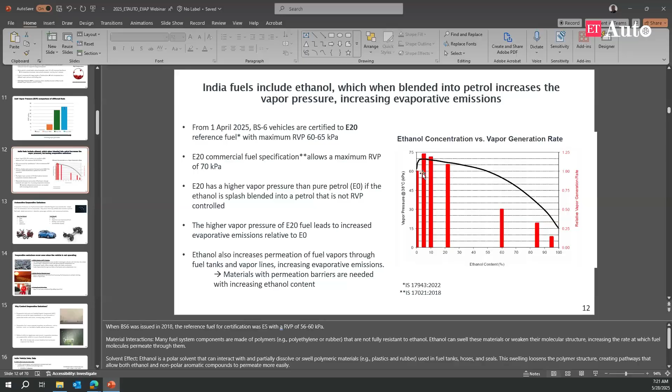So that's one of the strategies that areas like the US and California use, is they manage the RVP increase. They say that adding ethanol, you cannot have an increase in the vapor pressure. So you basically have to pull out some components in the base gasoline, like butanes or pentanes, to bring the vapor pressure of the gasoline down, something in maybe the 50, 55 kPa range, so that when you add ethanol, it stays around 60. That's one way that you manage it.

The other way is you just recognize that it is an important effect, and you design your systems to account for that increase. So there are different strategies for how you can deal with the effect. The simplest one is on the control side, because it is very difficult and costly to control the vapor pressure of the petroleum - that's a very costly type of control strategy to do RVP control of fuel.

Okay, another question - what is NMHC emissions and how is it measured? So NMHC refers to non-methane hydrocarbon. When they're doing exhaust emissions, it's essentially measuring the non-methane hydrocarbon component, and that's the same as what would occur for evaporative emissions.

You'll oftentimes hear them referred to as non-methane hydrocarbons or volatile organic compounds - those are the two common acronyms. And the way that, at least for the evaporative emissions side, they're measured is with an instrument called a flame ionization detector, or an FID. It is just a piece of specialized equipment designed to measure those non-methane hydrocarbon species.

A couple of questions from Pradeep Bagade. What are the procedures of regulation to measure evaporative emission during regular COP testing? And why is vapor pressure for E20 petrol more compared to ethanol 100?